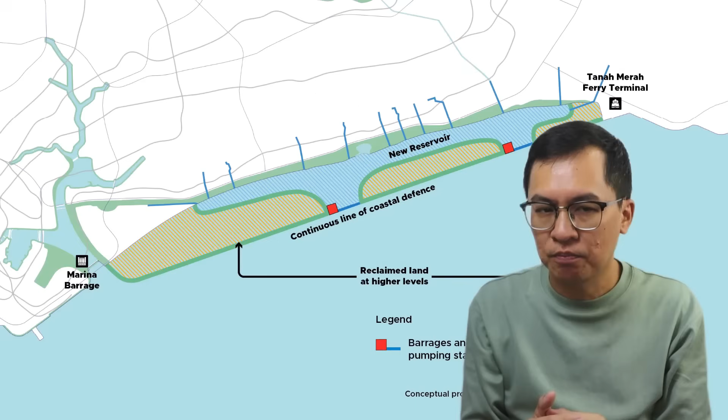Most recently, the Urban Redevelopment Authority or URA unveiled the Singapore Draft Master Plan 2025, or DMP 2025. This is a development blueprint for the next 10 to 15 years to support diverse housing and lifestyle needs, enable a competitive economy and vibrant workspace, strengthen climate resilience, and enhance our sense of belonging. This video will cover 4 key themes in the DMP 2025 that cover more than just housing. Let's head straight into the discussion.

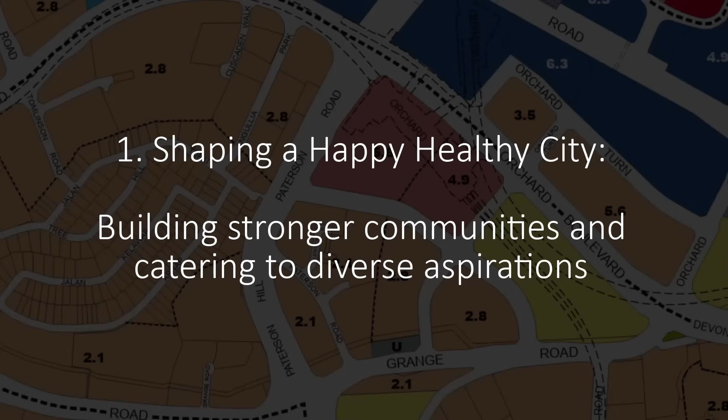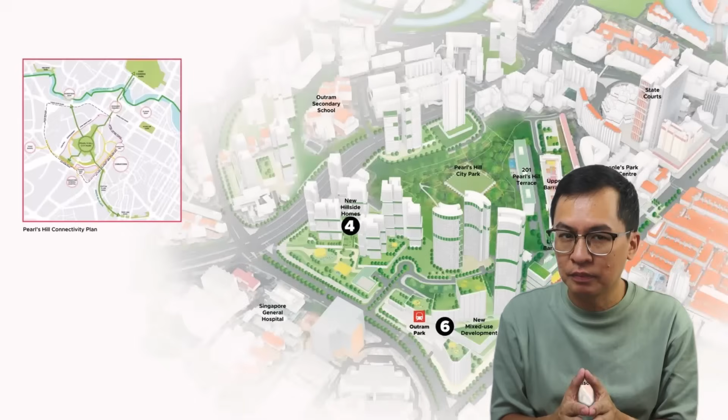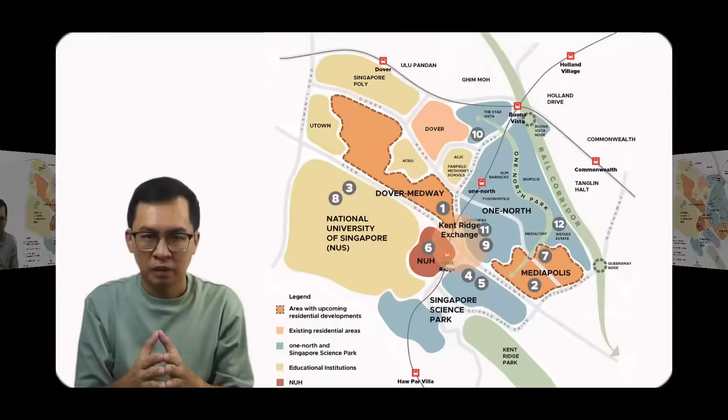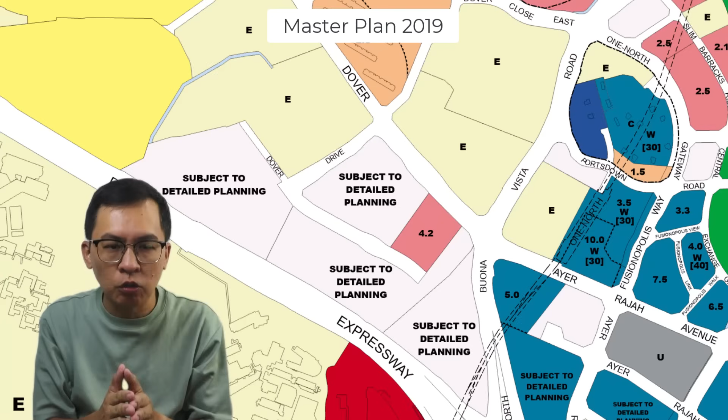The DMP 2025 presents plans for more housing options, in addition to plans for new neighborhoods in more central locations as previously announced. These locations include Pearl's Hill, Marina South, Bukit Timah Turf City, the former Keppel Golf Course, and Mount Pleasant. The master plan outlines plans for more new homes and neighborhoods across the island. Firstly, there will be a mix of public and private homes, along with amenities, introduced at Dover-Medway along Dover Road in the Greater One North area. The new Dover-Medway neighborhood will support residents who wish to stay close to work and learning spaces in the knowledge hub, home to leading technology, media and biomedical firms and institutes of higher learning.

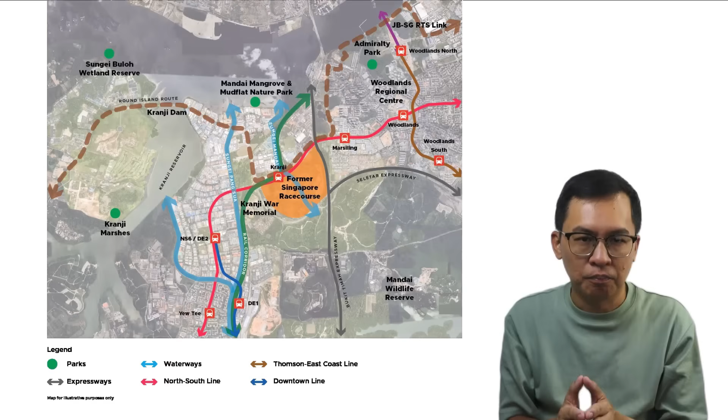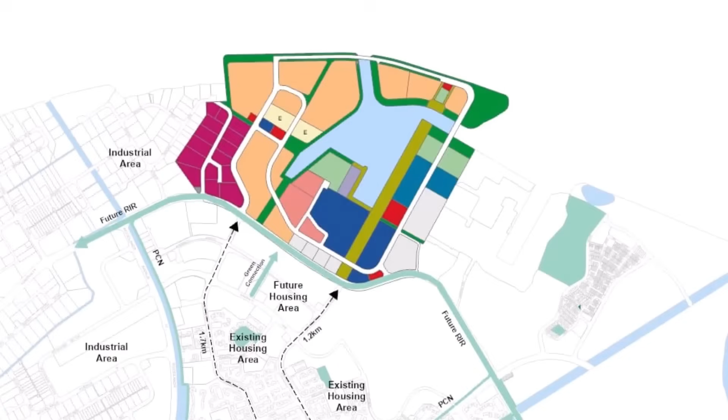Next, let's head over to the north at Kranji. The site occupied by the former Singapore Racecourse will be redeveloped into a new housing estate, capitalizing on its rustic surroundings to blend recreation and leisure activities with daily life. After the relocation of existing use from 2028, the Sembawang Shipyard area will be progressively transformed into a distinctive mixed-use waterfront district, where the design of the future housing estate will take into consideration the area's coastal and maritime character.

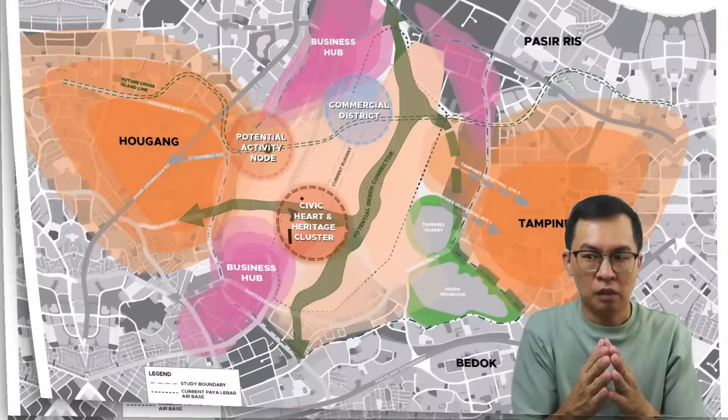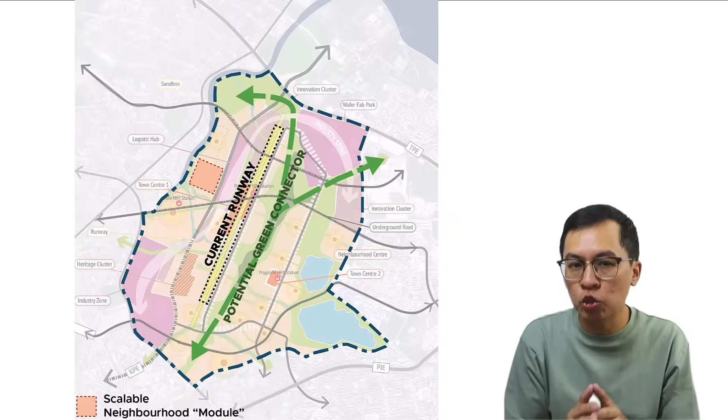Following the relocation of Paya Lebar Air Base from the 2030s onwards, the site and its surrounding area will gradually undergo a major transformation into a community-centric and future-ready town. It will feature an extensive network of green and blue spaces, well-connected mobility options, and a distinct aviation character.

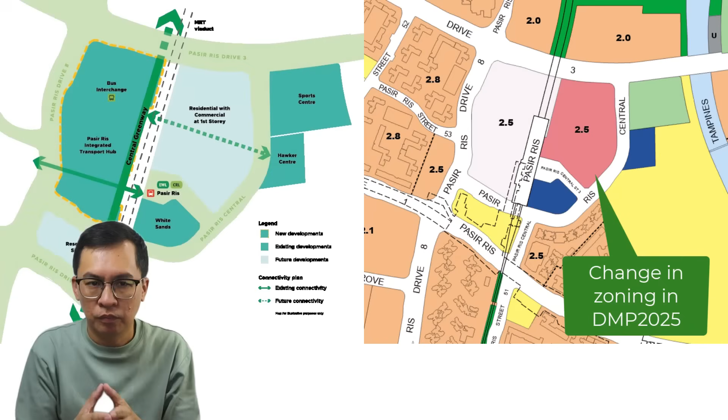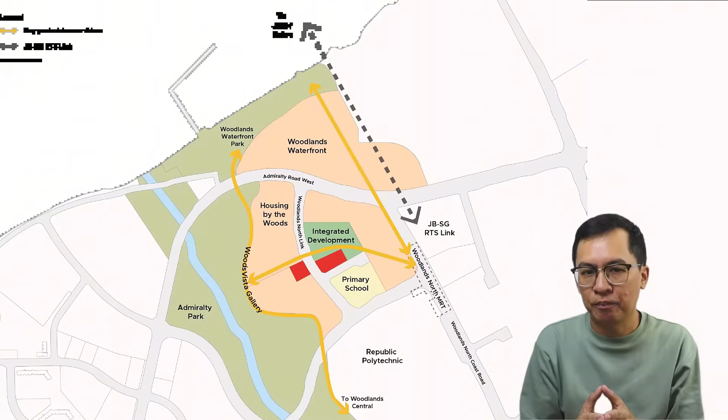At the same time, in existing towns such as Pasir Ris, the authority is studying a new neighborhood near Sungai Loyang, which could include homes, commercial and community facilities, and a linear park along Sungai Loyang. Then there is also the Woodlands North Coast, which comprises 2 unique housing projects, Housing by the Woods and Woodlands Waterfront. This precinct will have convenient access to various amenities and employment opportunities, as well as to the rest of Singapore and Malaysia via the nearby Woodlands North MRT station and the Johor Bahru-Singapore Rapid Transit System link.

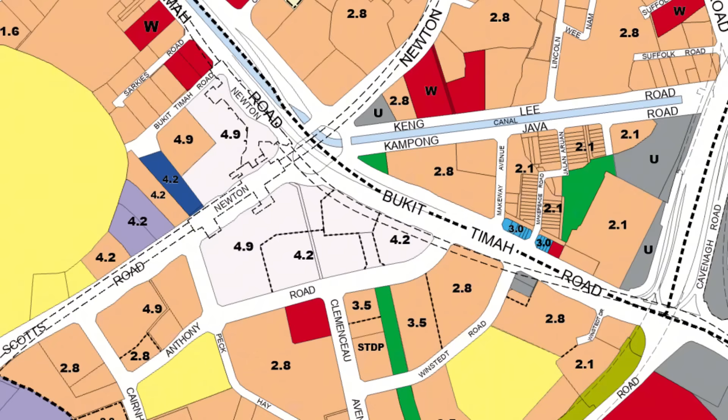There will also be more opportunity to live in and near the city centre, with a new Newton neighbourhood planned next to the Newton MRT station, comprising 3 clusters at Newton Circus, Scotts Road and Monk's Hill. The neighbourhood will be shaped as a vibrant mixed-use urban village with new homes set amidst greenery.

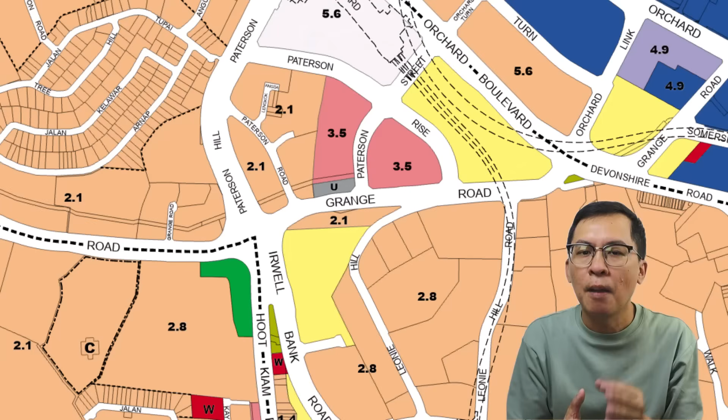At the doorstep of Orchard Road, the new Paterson neighbourhood will also be transformed into a bustling mixed-use hub with new residential developments, shops and public spaces. Currently this is an empty piece of state land. Maybe they should also build a hawker centre to bring back the crowd to Orchard Road. What do you think?

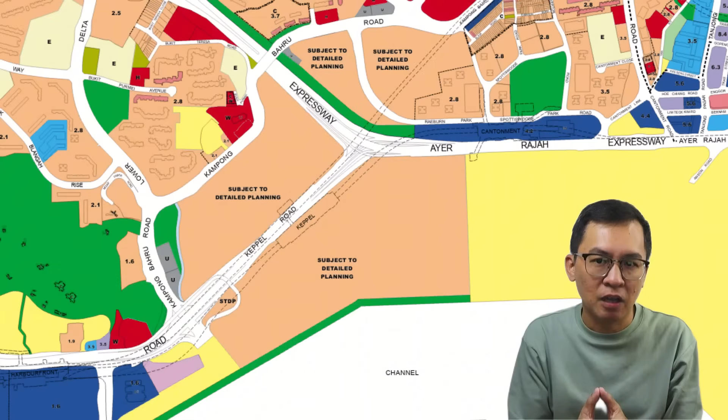Anyway, at the southern end, after the port vacates, Keppel Terminal and Keppel Distripark will welcome new homes along a unique waterfront setting with access to nodes like Harbourfront and Sentosa. This area confirms private condos. Another reflection at Keppel Bay in the making?

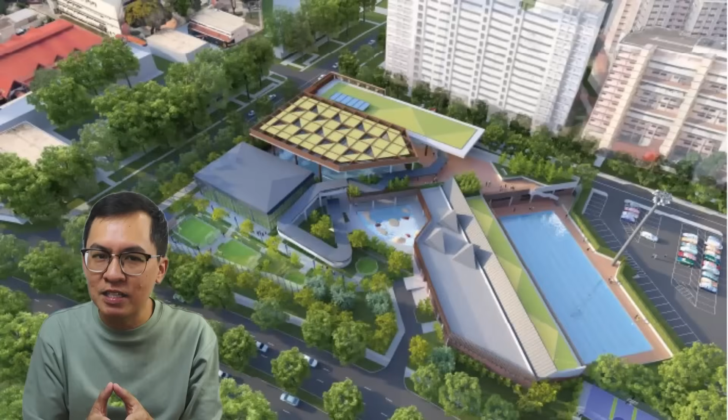The DMP 2025 is not all about building more flats and condos only. There are also plans to bring recreation and amenities closer to everyone, including better access to recreation spaces and amenities such as sport facilities, retail and community space, in addition to every household being a 10 minute walk from a park.

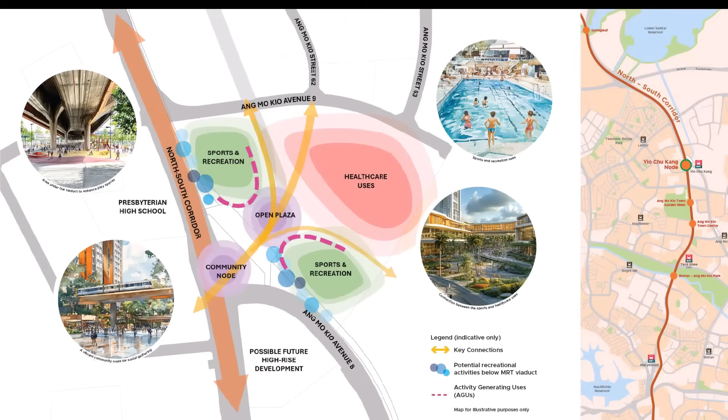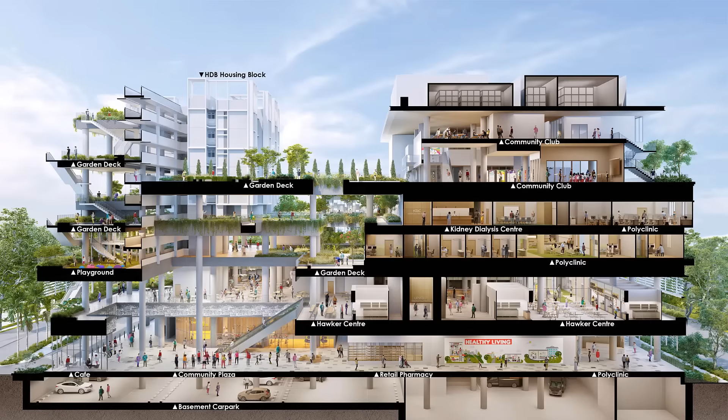Proposals include providing new integrated community hubs, including proposed hubs in Woodlands, Yio Chu Kang and Sengkang, conveniently located near transport hubs. This integrated community hub will bring together sports, recreation, healthcare and retail facilities under one roof to better serve residents' needs. These community hubs, such as Heartbeat@Bedok, One Punggol and Our Tampines Hub, are popular places for residents, and even for myself.

Besides integrating recreation facilities into new neighborhoods, there are also plans to work with agencies to activate underutilized areas, such as space below MRT viaducts and the rooftops of HDB multi-storey car parks, for social and recreation activities.

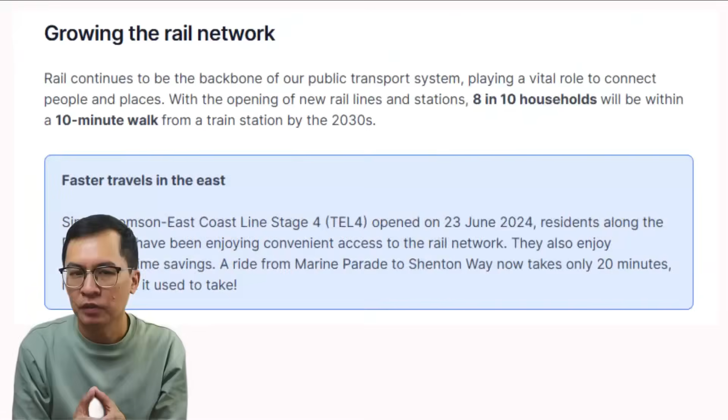Singapore is also on track to have 8 in 10 households within a 10 minute walk from a train station by the 2030s, as part of the national objective to enhance connectivity while reducing car dependency. Our cycling network will be expanded to around 1,300 km by 2030 to encourage healthier and greener journeys. There are also plans for a new pedestrian bridge connecting Marina Centre and Bay East Garden.

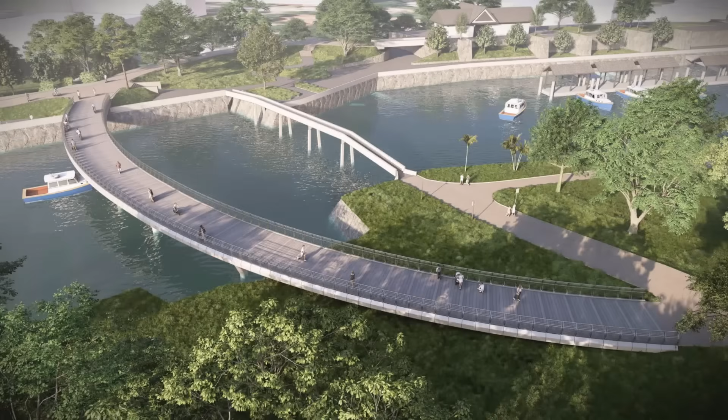This is definitely good news for joggers like me. By 2028, a new Changi Point Bridge will improve cycling connectivity from Changi Point Waterfront Park to Changi Beach Park across Sungai Changi.

The focus of the DMP 2025 is to continue driving Singapore's economic growth by strengthening our economic gateways and business nodes, rejuvenating key precincts, and supporting innovation.

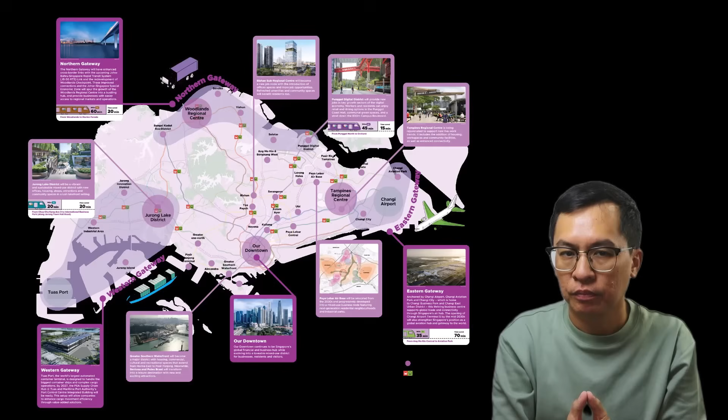The Northern, Eastern and Western Gateways will continue to grow as important economic hubs. Upcoming development in Woodlands Regional Centre will capitalise on the RTS link, targeted to be ready by end 2026.

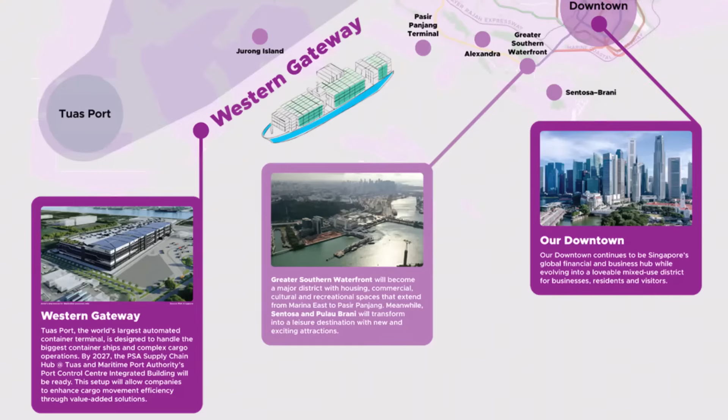The opening of Changi Airport Terminal 5 in the mid-2030s will reinforce Singapore's position as a global aviation hub. The PSA supply chain hub and Tuas Port, scheduled to be completed in 2027 and the 2040s respectively, will enhance Singapore's

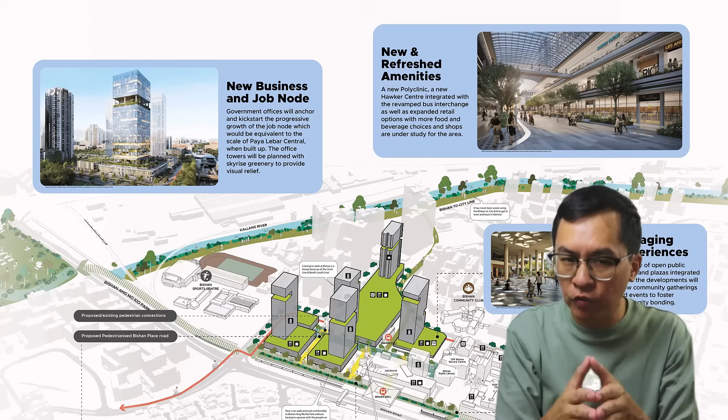logistics capability and port capacity. Bishan Sub-Regional Centre, for example, will undergo rejuvenation with new workplaces, amenities, and pedestrian-friendly streets. Agencies are studying the potential of transforming Bishan Place into a landscaped pedestrian mall, as well as plans for a new polyclinic and potential hawker centre that could be integrated with an upgraded bus interchange.

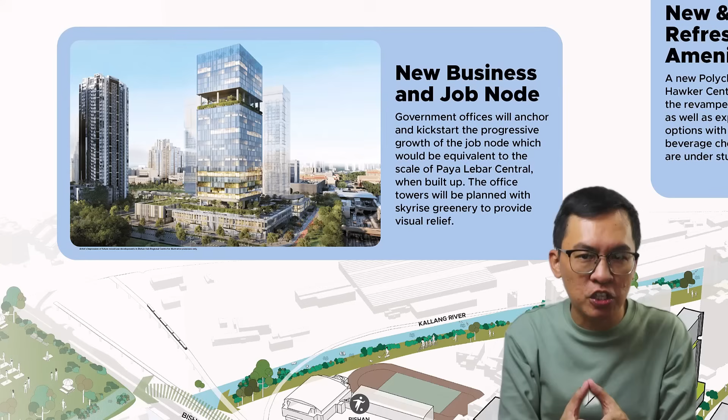In addition, a few government agencies are currently exploring the feasibility of relocating their offices here to jumpstart the development of this business node.

Property prices confirmed shoot out the roof in Bishan. How will property prices go down?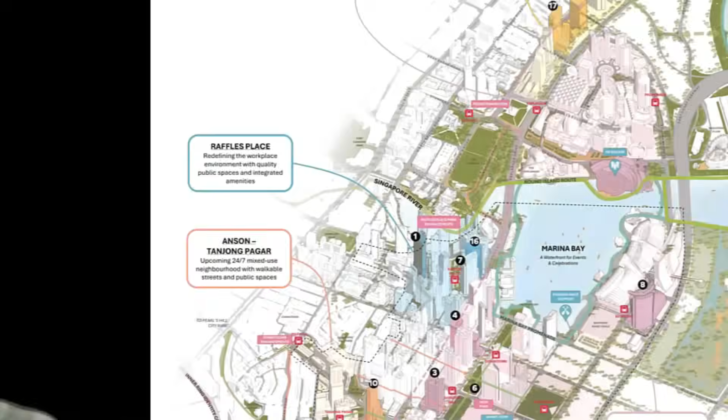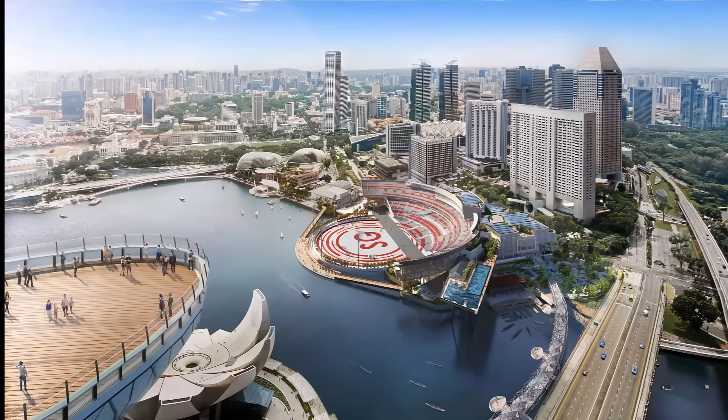Over in Marina Bay, new attractions will be introduced to boost our city's capacity to host international events in a vibrant environment for locals, businesses, and leisure travellers alike. These include a blended wellness destination and recreation space in the bay such as NS Square and Passion Wave Outpost at Bayfront, as well as the expansion of Marina Bay Sands. This effort will further enhance Marina Bay as an inclusive and welcoming destination.

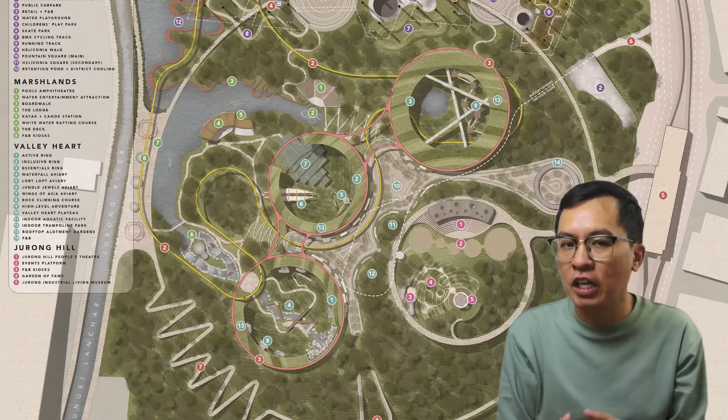There are also plans on the table to reimagine the former Jurong Bird Park and Jurong Hill. These are some of the winners from the design competition, who envision the area as a mixed-use precinct that blends work and leisure and is anchored by the site's unique terrain and industrial identity.

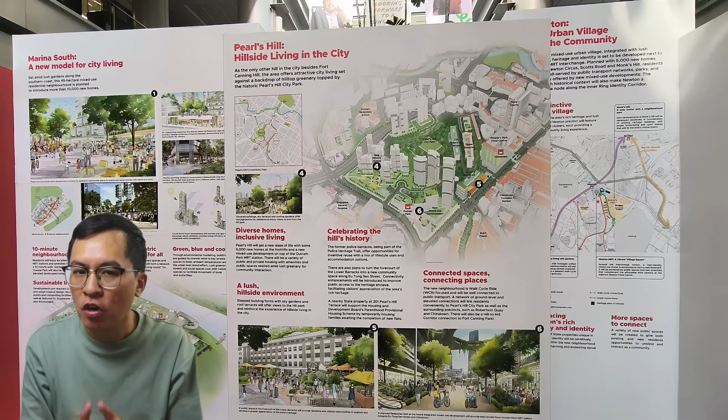The DMP 2025 outlines strategies to address the impact of climate change, such as rising temperature and sea level, and presents further efforts in optimizing land use both above and below ground. This initiative will continue to be expanded and refined to ensure that Singapore remains liveable and adaptable in the face of future challenges, alongside ongoing efforts to redevelop the city in response to the changing needs of our people.

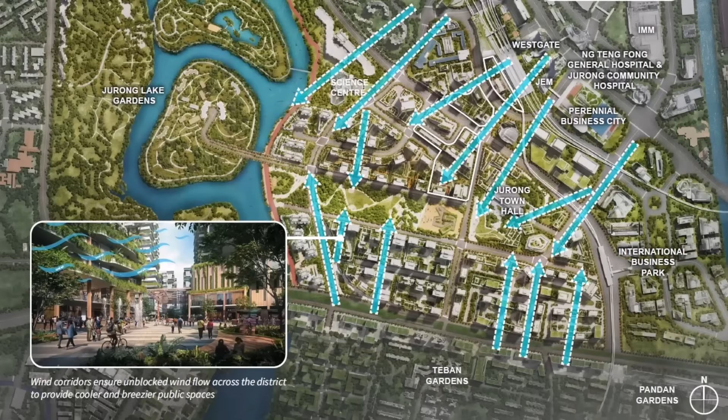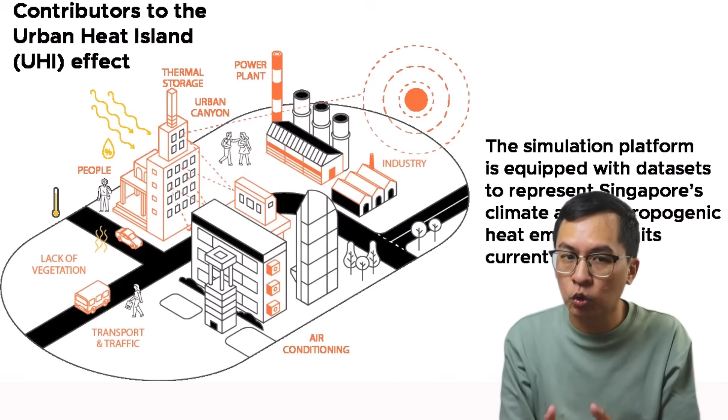With Singapore's mean temperature projected to rise significantly by 2100 due to climate change, efforts are underway to design a cooler and more comfortable urban environment. Even as we continue to develop, environmental modeling tools are being developed in collaboration with local universities to create more climate-sensitive urban design, contributing towards a more comfortable environment for precincts.

With rising sea levels posing a critical threat, Singapore is advancing plans for Long Island. Beyond coastal protection, water and flood resilience, Long Island will create land for future needs and recreation opportunities.

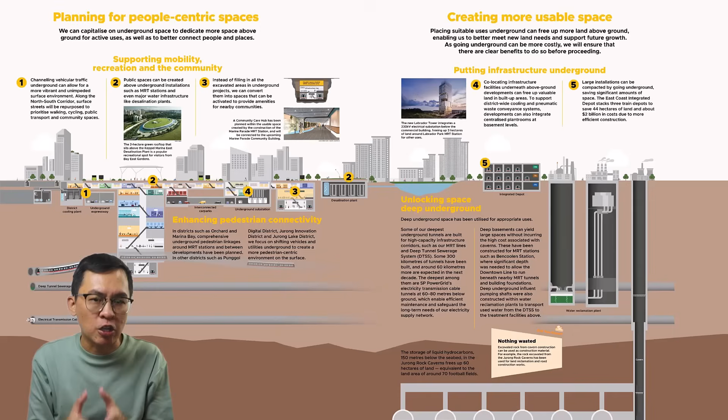The DMP 2025 will tap on our underground space to free up valuable surface space for people and build robust infrastructure to support long-term growth. Some examples include the MRT tunnels, the Deep Tunnel Sewerage System, and Jurong Rock Caverns, helping to free up valuable surface land while supporting the development of infrastructure.

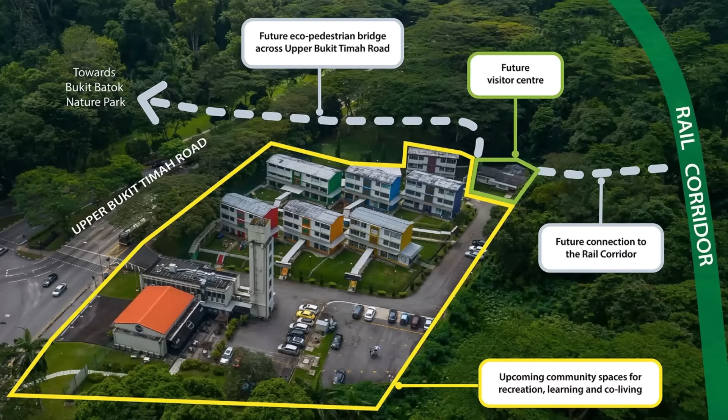Striking a balance between social, economic, and environmental considerations remains a key tenet of the DMP 2025. Beyond enhancing our heritage spaces, we will leverage innovative approaches to ensure that Singapore continues to develop sensitively as a city in nature. Our vision towards becoming a city in nature has progressed steadily.

Over the next 5 years, we will target to implement more than 25 new parks and over 50 kilometers of park connectors. The upcoming Kranji Nature Corridor, for instance, will strengthen ecological connectivity in the northern region of the island between the Mandai Mangrove and Mudflat Nature Park and the Central Catchment Nature Reserve.

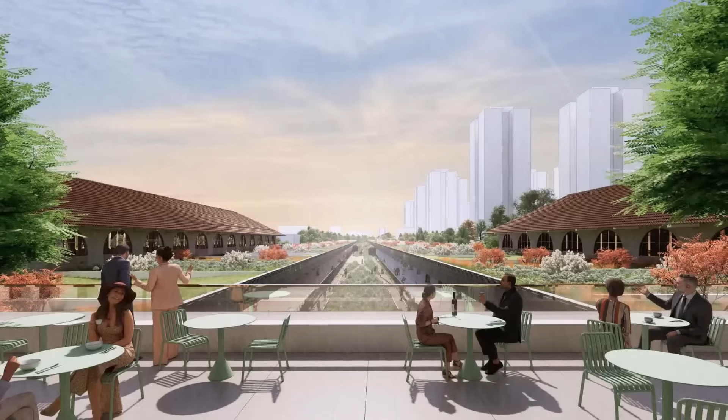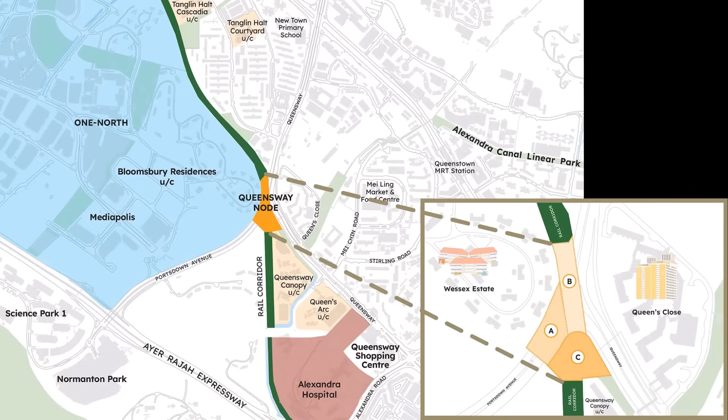There are also plans to build on our heritage through adaptive reuse of selected buildings or enhancing the character of areas through sensitive urban design and place-making initiatives. Many of such buildings are dotted around Singapore.

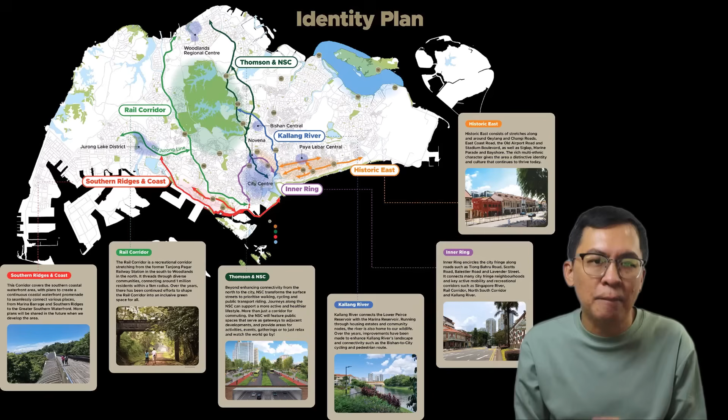Apart from conservation, URA has identified 3 new identity nodes at Siglap, Moonstone Lane Estate, and Newton. They add to the 18 existing identity nodes which URA previously identified based on their distinctive local character and identity, and progressively enhanced over the years.

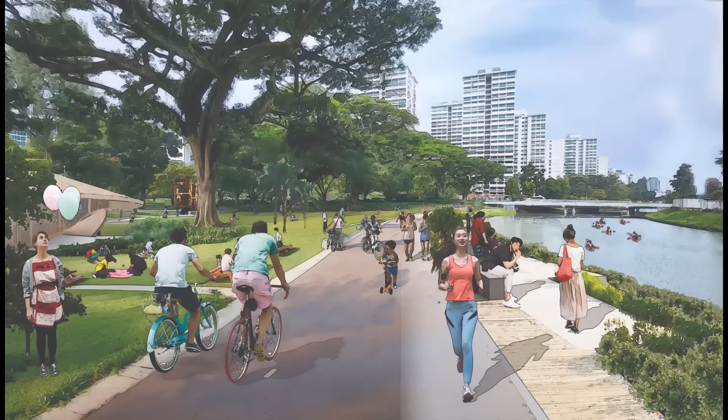These include more inclusive spaces, including a new pedestrian mall at Katong and new parks along Kallang River, such as the Moonstone, Bendemeer and Potong Pasir St. Andrew areas.

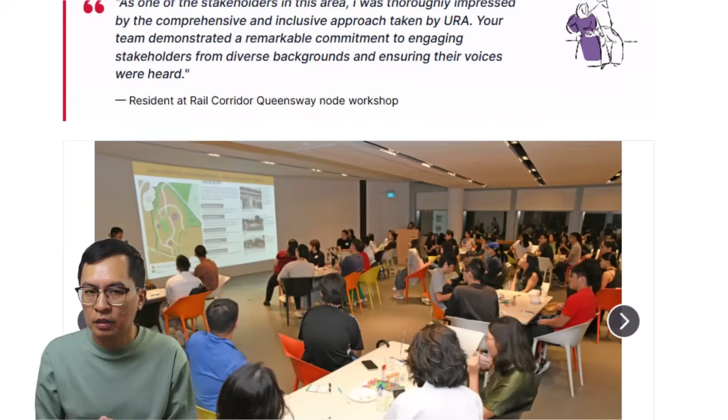Since October 2023, URA has engaged almost 220,000 people for their feedback on development plans of varying scale in the master plan, shaped around the 4 themes mentioned earlier. Through multiple platforms, including exhibitions, dialogues, focus group discussions, and surveys, URA carried out its most extensive public engagement effort to date to ensure that the master plan balances diverse priorities at the national, community, and individual levels.

Here, let us applaud URA for their hard work.